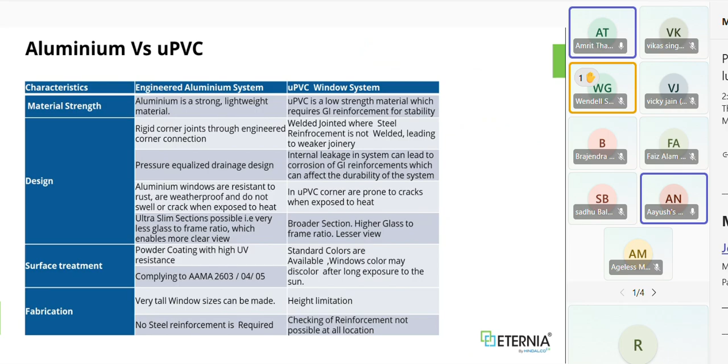So we have already covered aluminum versus UPVC, and aluminum versus traditional aluminum system.

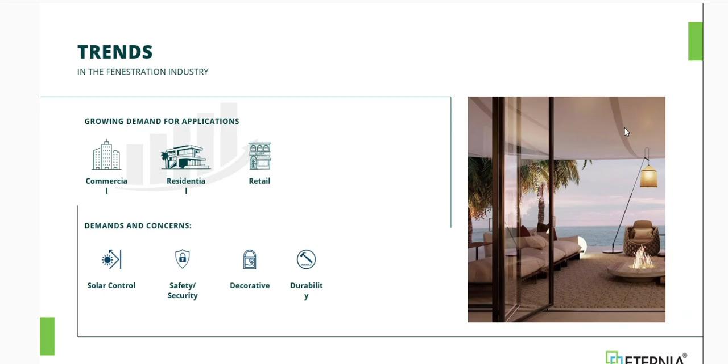As the years pass, you cannot know if the weather will remain the same. We are all offering products for another 10, 20, or expected to be used up to 25 or 30 years, but we cannot predict the environment for the next 50 or 10 years. So the climate changes day by day, and as India is in the fourth position for cyclones, that means your windows need to be stronger to withstand it.

That's why tested system windows are required in the market, so we can ensure our windows can withstand up to 2.5 kPa. Each area and location has different wind speeds, which can easily be found on Google.

So when we know the wind speed, after knowing the building size, length, width, and height, we can calculate the wind load of that particular location. In Window Maker, this feature is automatically involved - whenever you put in the location and sizes, you get the wind load automatically in the system.

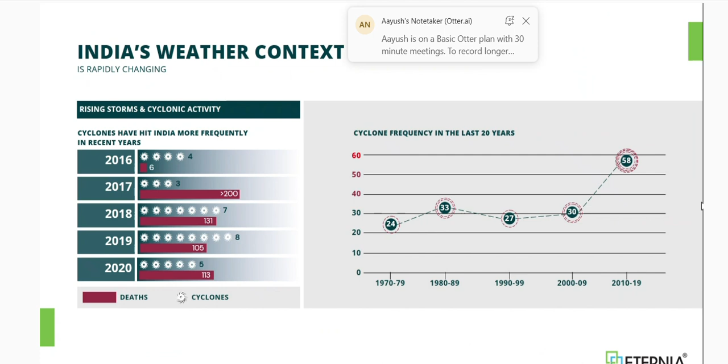If we talk about percentage, in the last 20 years it rose from 30 to 58. This is the percentage increase of cyclones in the last 10 to 20 years - a major impact, so we design the system accordingly.

So that's just a general perspective about the environment, so that you are aware of why you require a better quality of windows in your house to protect it over the next 20 to 30 years. So you need better windows.

So if we talk about windows and doors, there is a difference between windows and doors. Windows are only required for light and air to pass, but people cannot move through the windows. The bigger opening through which people can pass is called a door. So this is the difference between the door and the windows.

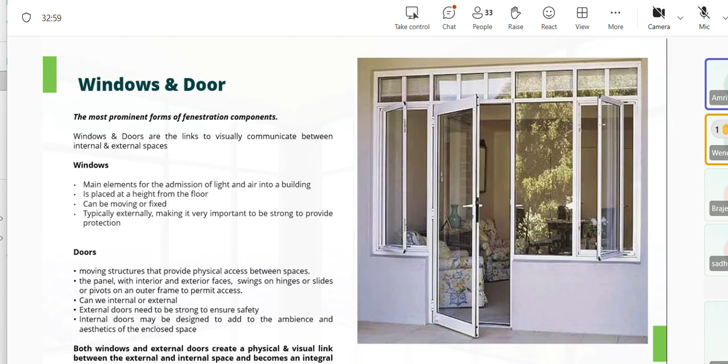There are two basic categories of windows, called sliders and casements. All the different typologies and segments in the market come under only two categories. One is called the casement category, the other is called the slider series. In sliders you can have lift and slide, tilt and slide, minimal, basic slider. So all kinds of sliding come under the sliders.

And in casements, you can see fixed windows, openable doors, windows, ventilators, tilt and turn, sliding folding. These all come under the casement. And then it gets subdivided at different levels. If you talk about the openable, it becomes side openable, bottom hung, top hung. These are the openables. Then if you talk about side hung, it can be a single sash or a twin sash.

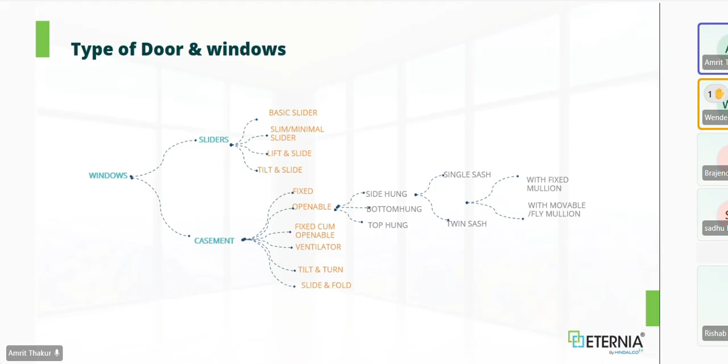If we talk about fixed with a mullion, or movable with a fixed mullion, there are multiple segments, and then again it can be divided into further segments. So the two major categories are slider and casement.

These are the various typologies which we talked about on the previous slides. You can see this is called openables. This is called sliding. This can be a French openable, where both shutters can be opened. This is called a top hung window. This is called tilt and turn. This is called top hung windows. This is called sliding. This is center fixed sliding panels.

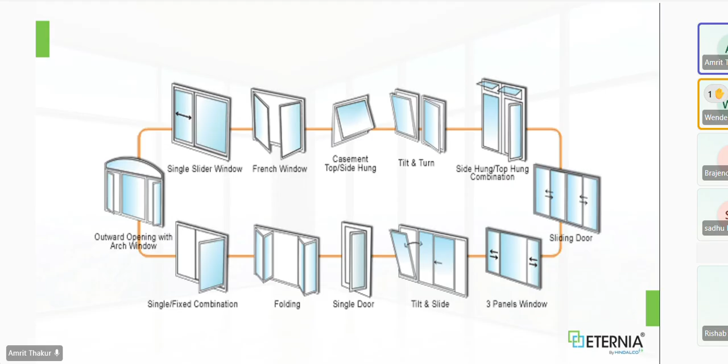Tilt and turn, tilt and slide, sliding with a center opening, foldable. This is a fixed window or a combination with openable. So these are the various small combinations visible on the screen. Besides these, you have multiple types: bay windows, rotatory windows, arch windows, sliders, slimline. So multiple types of windows are there.

And now we talk about some nomenclature normally used by civil engineers or architects. This nomenclature you will easily see in your day-to-day life. So if we talk about this, the top portion where the window is screwed at the top, this surface is called a lintel.

The bottom surface where the window is installed is called the sill level. And the left or right portion where the window frame is fixed, this vertical portion is called the jamb. So there are three terminologies you normally use: the sill, the lintel level, and the jamb side. These are the basic nomenclature you'll be using in your industry.

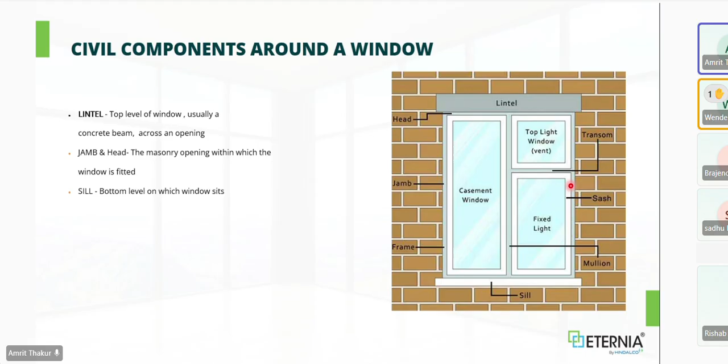Now we talk about the window components. We talk about the fixed window. This is called the outer frame, which is fixed on the perimeter of your opening. The frame visible on the opening perimeter is called the outer frame. And in the center portion, one member comes horizontally and one vertically. The vertical member is called the mullion and the horizontal member is called the transom. So these are two different profiles.

And then if you see the openable part, this is called the sash, or you can call it the shutter. And at the bottom, there is no member here. But if there is a member, it's called with threshold, without threshold, flush threshold. So the bottom member which comes in between the doors is called the threshold.

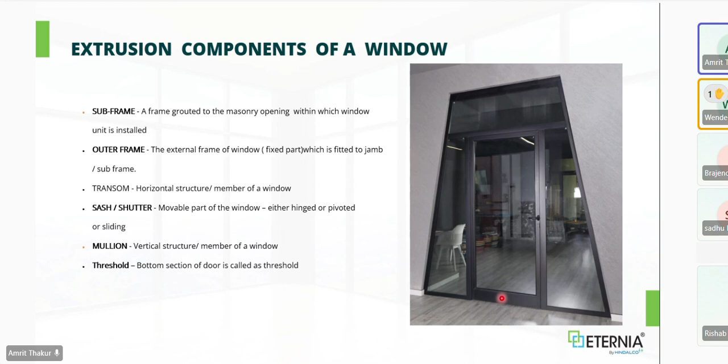Now we talk about sliding. In sliding, the outer frame is the frame fixed on the perimeter. Then you have shutters which slide. These are the two sliding shutters, called sash or shutter. And these are called interlocks.

The center part, like a mullion, this center is called the interlock. Interlocks are of two types, inside and outside. The outside can be a projected one, or not projected, a flush one.

Inside is your flush or inside is also projected. So different types of interlocks are available based on different companies, based on different series. So these are called a normal interlock. And then this side where the handle is getting fixed, this is called the handle section, the vertical handle section. And these horizontal members and the vertical member are called Georgian bars. So this is the basic component which we'll be using in the slider, and the previous one was for the casement.

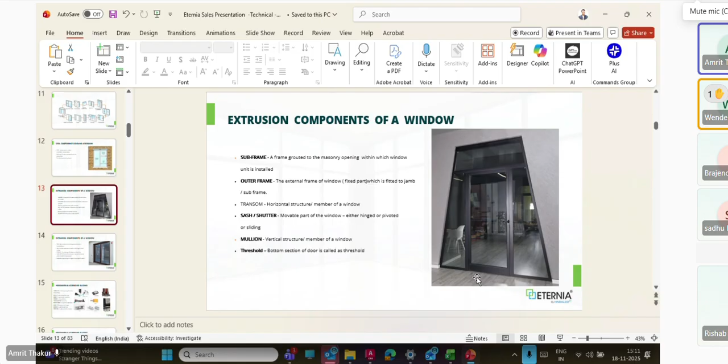Now we see some hardware components. There are a lot more, but specifically these are the components which will be used. This is called corner cleats. This is the shape. This can be an extruded one, or this kind also. So there are multiple types of corner cleats in the market. This is one type which will be fixing your shutter, and it will be used in outer frames.

This is the gasket. Its size or design will change based on your outer frames. The purpose of this gasket is to cover the gap. Otherwise, dust will be accumulating in these cavities. To avoid that, we put this kind of gasket.

These are called rollers. You have multiple types of rollers: single roller, double roller, adjustable rollers. They are fixed in your shutter bottom. You always have one pair of rollers on a single shutter. Each roller has a different weight capacity, so the roller is decided based on the weight of your shutter.

This is called striker. This is the nib which will be fixed on your lock body, and this is your receiver. This lock portion will lock this. This part will be fixed in this cavity, and this will be your handle part. When you move it up and down, this notch or nib will insert in between this to lock and unlock.

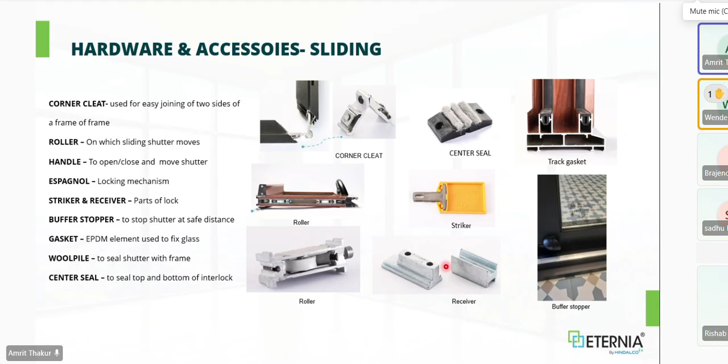This is the handle which I am talking about, and this is your nib. This is called the BSM lock. This is the main lock body. This is the cover cap. You can see this comes on the outside face like this, and this inside one is called BSM. And this bolt is called a mishandling.

This is a bolt, duo bolt. So this will be fixing as a mishandling when it will be getting pressed, so the stack can move up and down. Otherwise, it cannot move. And this is your nib, which will be inserting for the locking purpose. And this is your receivers.

This is called junction plugs. These are all junction plugs. So the junction plug which will be coming on the handle side. This is your handle side where you will be fixing your handle. So this is called handle junction plug, and this is called interlock. So at the interlock position, wherever the junction plug is coming, it's called interlock junction plugs.

And this is your interlock cap, which will be visible from the outside. This is visible from the outside. This part will be going inside, and this cap is called interlock caps. This interlock cap will be a projective one. If the interlock is projective, this kind of a cap is required to cover the cavity.

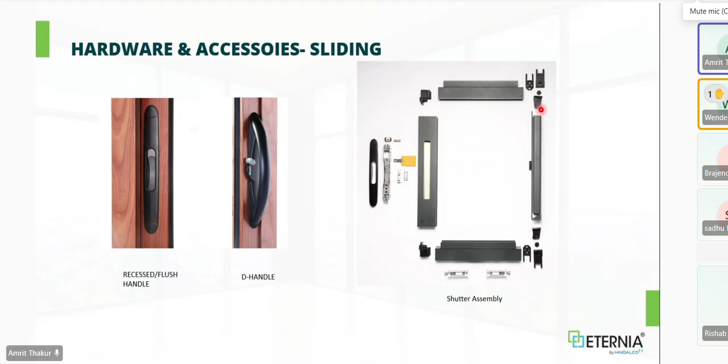If we talk about the glass, these are the few glass terminologies used by the industry. A single glass or SGU, single glass unit. We always offer toughened glass. We are not offering any annealed glass. Annealed glass is exclusively required when the size is too small, where toughening is not possible. In that scenario we are giving the annealed. Otherwise, we are always offering toughened glass.

So whenever we are talking about the glasses, we are talking about the toughened glass. So this is a toughened glass. This is a single glass. That means a single piece of glass. This is double glass. That means two glasses sandwiched together with the spacer tape. That is called double glass unit.

So the glass thickness can vary: 5, 5, 5, 6, 5, 6, 6. So these are the different glass thicknesses that can be used. The spacer has different thicknesses, for example, 8 mm, 10 mm, 12 mm. So if we talk about 20 mm glass, that means 5 mm outer glass, inside is 5 mm glass, and the center will be your 10 mm spacer. So 5, 10, 5, that is called DGU glass.

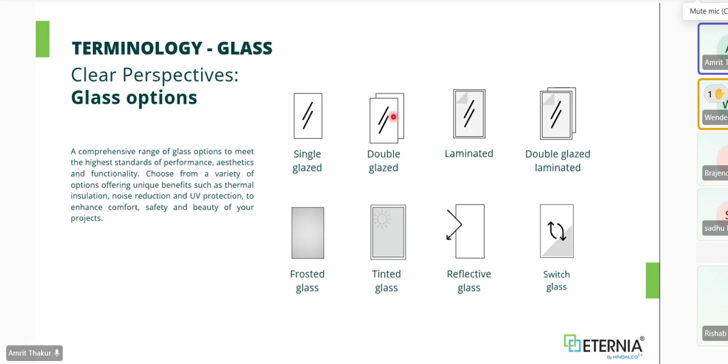Then there is one type of glass where you have blinds. So in DG you have a blind option also. You can have a blind which can be a remote blind or manual, or you can have an automatic. These are the various glasses. Here it is an image reference. You can see this is called a single glass. The single glass is available in 5 mm, 6 mm, 8 mm, 10 mm, 12 mm. These are the single glasses. Above 12 mm, there is no glass thickness available in the market.

Then you have a DG glass. So you make a combination with these glasses with a spacer. So you have a spacer with a limitation of 8, 10, 12, 16. So these are the spacers. So it is always recommended, whenever you are taking the thickness of the glass, your spacer needs to be 2x that size. Means if you are taking 5 mm glass, you need a minimum 10 mm spacer. If you are using a 6 mm, you need a minimum 12 mm spacer. 8, you will need a minimum 16 mm spacer. So always the glass thickness into 2 is the spacer thickness.

Most of the cases I have seen the glasses have been wrongly selected by the dealers. They are selecting 5-8-5, 6-8-6. 8 is not the correct spacer selection. Always use a minimum 10 mm spacer or go with a 12 mm. So that is more important to understand. Then this is the lamination which I am talking about. This is the layer which is called PVB layer or SentryGlas layer. These two glasses will be sandwiched. This is a railing, glass railing. You can see this kind. This is a laminated glass.

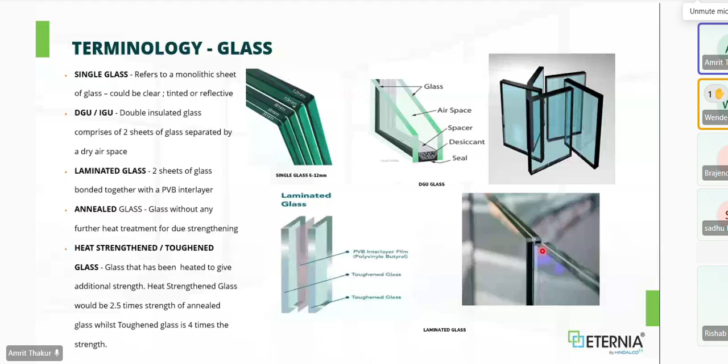Only the magnesium quantity is altered in the system, increasing the yield strength of your profile to make it 1.5 times stronger than normal alloy. So that is your Duranium material. It is slimmer, stronger, sustainable.

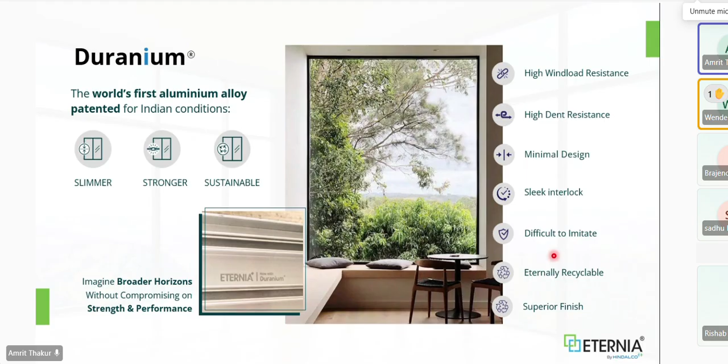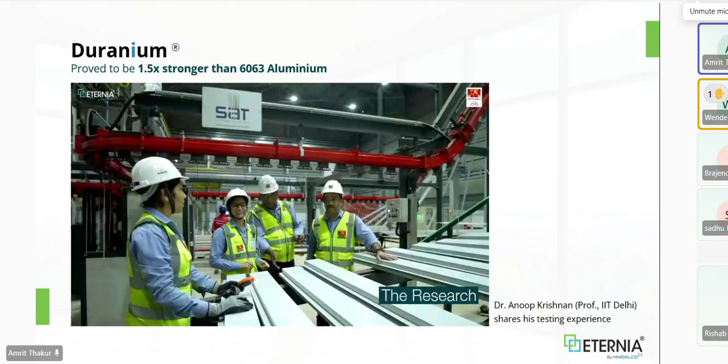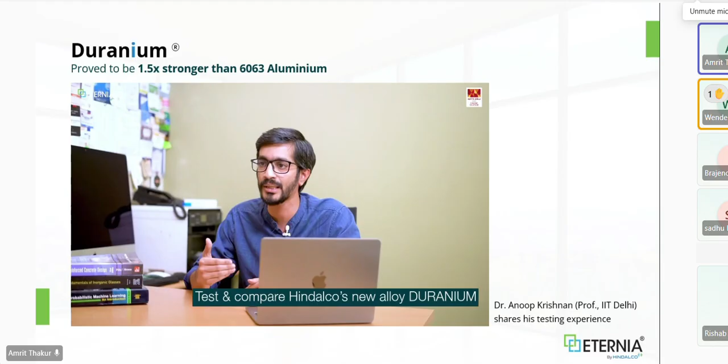Hi, I am Professor N.M. Anoop Krishnan from the Department of Civil Engineering, IIT Delhi. I work at the intersection of computational modeling, materials, and artificial intelligence and machine learning for materials discovery. Windows form an essential part of our home. But do we know how these windows are designed? Researchers from Hindalco and IIT Delhi got together to discuss this. More importantly, what is the role of aluminum and different types of aluminum in governing the strength and durability of these windows? Interestingly, Hindalco had developed a patented aluminum alloy, Duranium, so we wanted to also test how Duranium windows will perform in comparison to the standard aluminum windows.

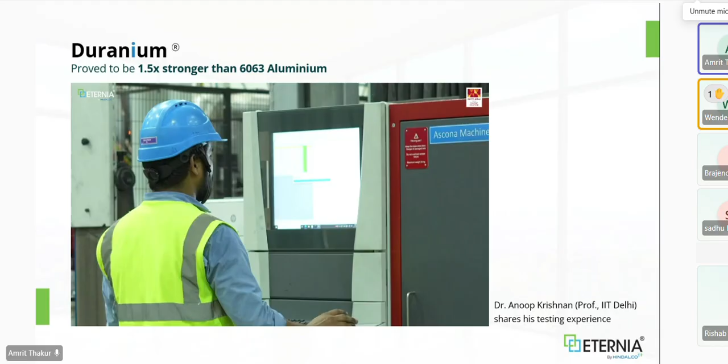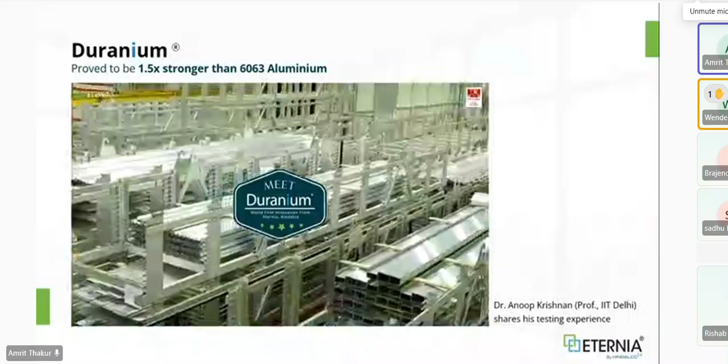We actually created windows and tested them in the lab and then made computer models for these windows using finite element methods and other numerical methods. To evaluate these models, we considered aluminum 6063 and the Duranium alloy. Duranium failed at a load 1.5 times higher than that of the aluminum 6063 windows, which essentially means that Duranium can take 1.5 times the wind load of the regular alloy. What does this mean? This means that even thinner sections of Duranium can take as much load as regular 6063 aluminum alloy. The results were really exciting to us. We decided to share it for the benefit of the larger community. The work was written up as a paper and was published in the Journal of Building Engineering, which is a high impact journal in the field of civil engineering. The researchers, who are peer reviewers, really appreciated the work and highlighted the benefit of this for the society.

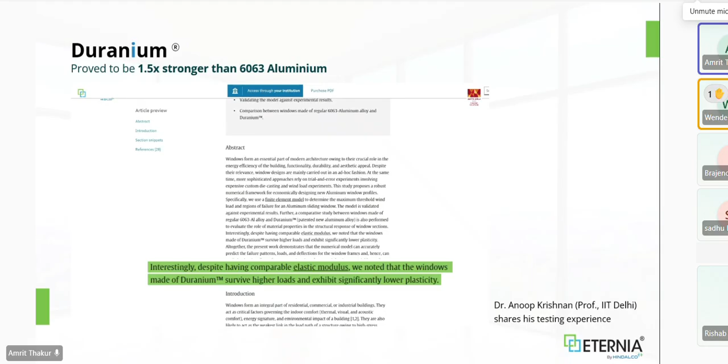So that was all about Duranium. Now the second point, that is WiWA. This is another patented method to identify whether the window is best suited to your requirement or not. So WiWA is wind, water, air. That means your window needs to be tested against wind, water, air, and we are taking the parameters we receive against wind, water, air, putting them in an algorithm and finding out the actual scoring of your product. So this is another advantage of WiWA in the entire history of the door and fenestration industry.

Only Eternia has thought about giving a window a scoring factor, which will be a unique way to measure the performance of your window irrespective of other windows. In layman's language, you can easily understand it as similar to electronic items where you get star ratings, 5-star ratings. If the product is 5-star, it's a high saver product, and if you have a 3-star or 2-star, it uses high energy. So similarly in the WiWA scoring we will be giving a figure from 0 to 10.

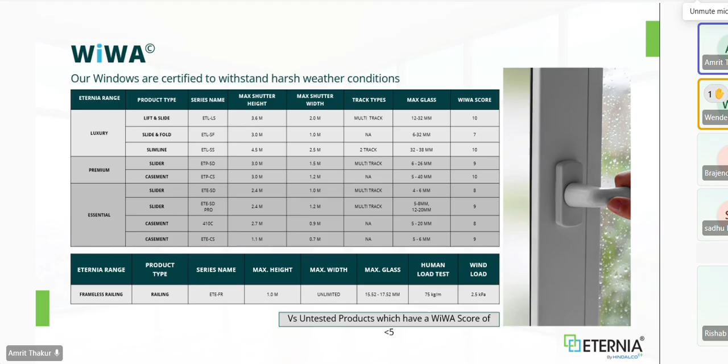Another is your Green Pro certificate. So what is the Green Pro certificate? It is IGBC Green Pro certified. Your product is a green product. That means whenever a builder is making a green building, or is taking some subsidy or benefits from the government by saying that his building is a green building, he needs to use green certified products in the building. In each area, whenever he uses a green certified product, he earns some points, and cumulative points are required to qualify as a green building project. Our product is green certified, so he will get the benefit of earning those points while using our product.

Then we have a warranty. We have a 12-year warranty on the profile and a 5-year warranty on hardware.

We talk about our presence as Hindalco. We have an integrated supply chain mechanism. In the entire India, only Eternia, or Hindalco, is the company taking raw material in the form of ores and supplying the end product as a window. This complete processing will be under one roof, under Hindalco. We are not taking extrusion from a third party or any other company. We are not outsourcing fabrication. It will all be under one roof.

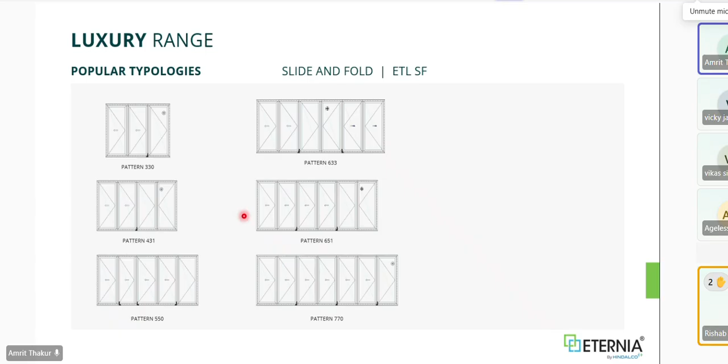I have a question here. Yeah, Vikas from Kolkata. As you said, there's a cost implication between these two options. So how much is it, and how much control do you have over it, application wise?

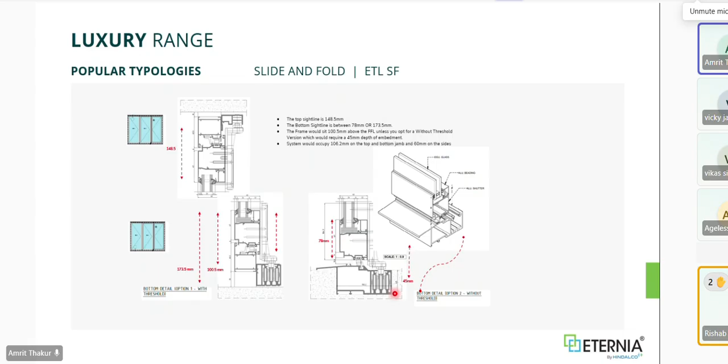So that was the top and bottom. Now we see the straight sight line for your center part — it will come around 206. So 206 is the vision part for your sliding folding. This is the sight line for your sliding and folding panel.

Any questions now for sliding folding? Any question?

I mean, internal application as well as external application — both we can use for sliding folding, only some arrangement needs to be done when it comes to the flooring part. Correct, yes, yes, yes, yes. You can use it, okay.

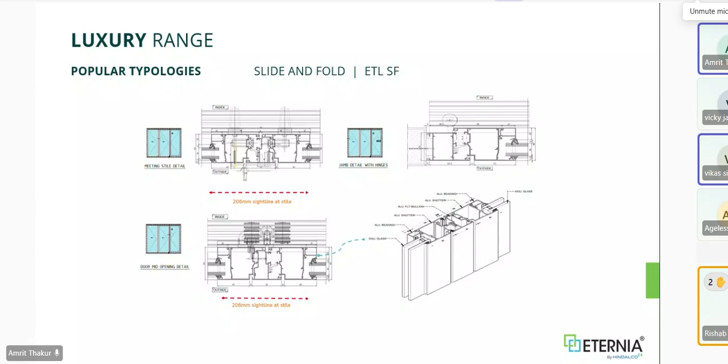If you talk about the interlock, you will be getting 20 to 29 mm. If you talk about the weight capacity, the roller is designed for a 400 kg capacity.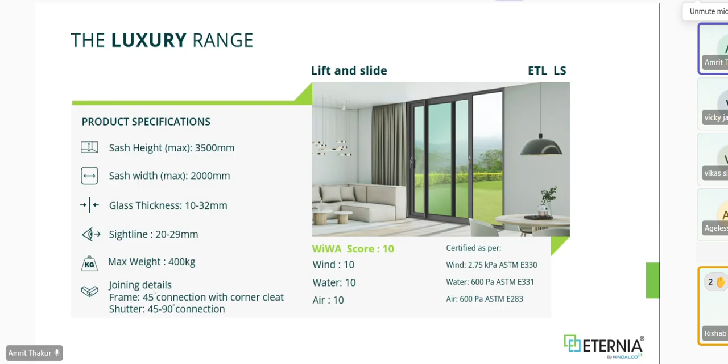Now let's talk about the typologies. You can make 5 typologies: 2-track 2-shutter, 2-track 3-shutter, 2-track 4-shutter, 3-track 3-shutter, or 3-track 6-shutter. One important point to note is in 2-track 2-shutter.

In 2-track 2-shutter, the interlock will be a sleeker one. Like if you see in ETP SD or the slimline, 20 to 25 mm will be visible in the interlock. But in the 3-track system, or 4-track, on the 4-shutter, 3-shutter or 6-shutter

this interlock is not going to be the same. Why is it not remaining the same? Because in lift and sliding, the main purpose is to lift and then slide.

To lift the shutter, you need a handle. So a handle is required in each shutter. In this 2-shutter, there is no problem - handle is coming here and here, so interlock is normal and okay.

But in this case, your handle is coming - one is here, second is this position or this position, depending upon the orientation. So left or right, if there's one panel you need one handle, and then the third handle will be here. So three parallel, three handles.

So handle is the block body, each and everything requires a bigger section. So here you need to use the same section which will be used at the handle section.

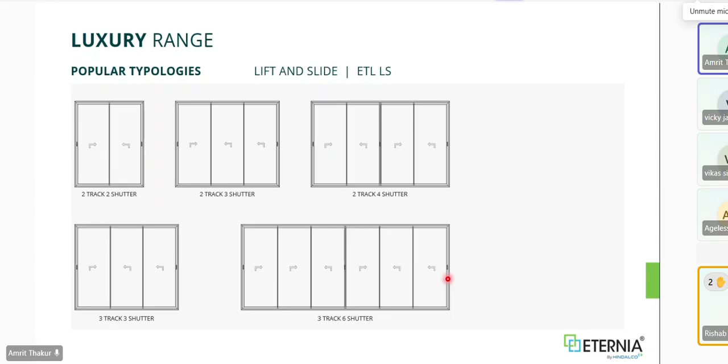I will show you some section detail. If you see this, this is a normal two track two shutter. This is your handle section, which will be coming at the outer frame. This is your interlock section. These are the different interlocks we are talking about, 25 to 20 mm. So this is the standard one, which will be offered in the two track two shutter.

But when we talk about three track three shutter, this is the condition. If you see, this is the design cutout at 3, so here you need a bigger one. This is 78 mm of interlock coming because you need to put your handle, and this projected handle will be coming outside. This is the condition for 3 track 3 shutter, so this is the bigger handle section coming.

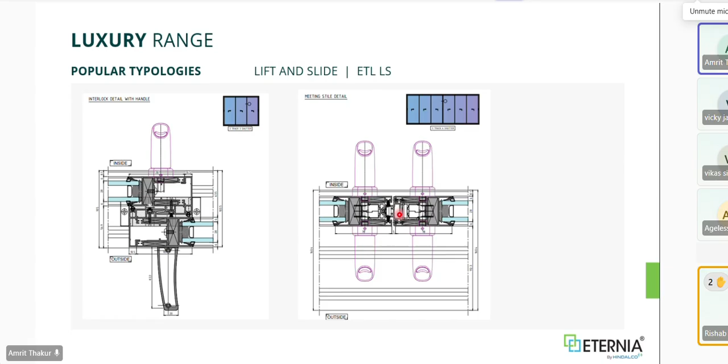In case of center opening, you will be having this kind of two handles. One handle is coming on this section, another handle is coming on this section. These are the basic variants that you need to understand. The key is this will be a bigger one.

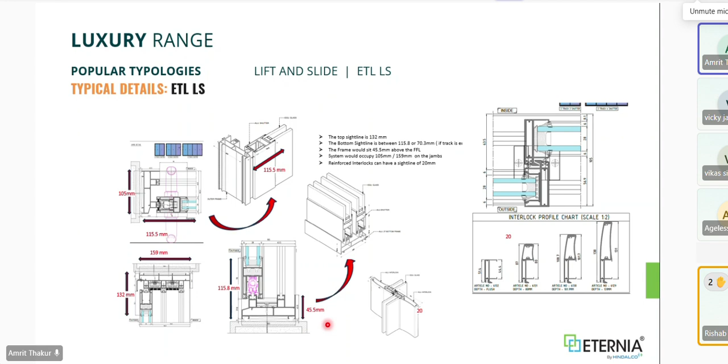So that is about the lift and slider.

And slimline, we are not going with this slimline. Some upgradation is ongoing in the design department for slimline. Once the updated product is available, we will share the updated one and roll it out, but till that time we will not be offering any slimline in the market. We will be holding the slimline for further notice. So slimline will be obsoleted, and we will be making new sliders and sliding folding doors with different specifications and sizes. So we are skipping this for now.

So now we have a premium range. In premium range we have two products. One is your ETP and another one is a casement, ETP CS. ET means Eternia, P means premium, SD means sliding door.

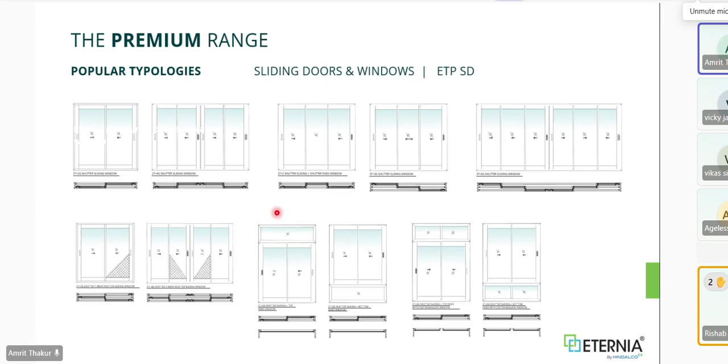But till now you will be getting two track, two shutter, three track, three shutter, multiple various options and combinations, mesh shutter you can get it. So a few non-typical designs we are going to add in the upgrade later, in another 1 month or so. So these are the various sightlines. You can see this is a two track option. This is 90 and 42.

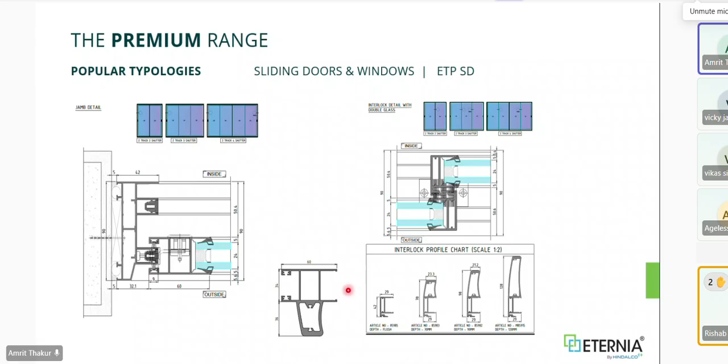So this is your interlock where you have four types of interlock. This is your handle section with the reinforcement. So above 3 meter, your handle section is going to change like this reinforcement handle section. And this is the various combination of your interlock. Right now you see there are four types of interlock.

We will be obsoleting the third one. We are going to remove this one. So this is going to be discontinued. Only the flush will remain. Then 50 mm. Then you have a 120 mm. So this 90 mm is going to be closed. We are going to discontinue this because multiple inventory is coming, so we want to reduce this inventory, multiple inventories. So this is going to be discontinued.

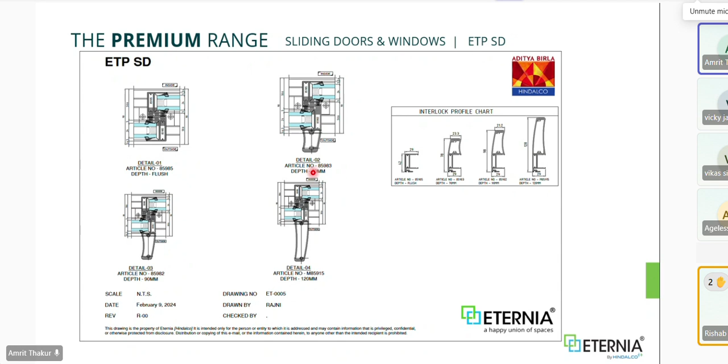But we have checked structurally, if the wind load is lower, if it is a wind load of only 0.8 kPa, then you can go up to 3.6 meter with this center opening also. So we'll check and we'll implement it in the window maker also. Theoretically it's passed, theoretically it's going well, but a trial needs to be done in the factory first. Then once the trial is done, we'll implement it in the window maker. So you can offer 3.6 meter height center opening with 0.8 kPa.

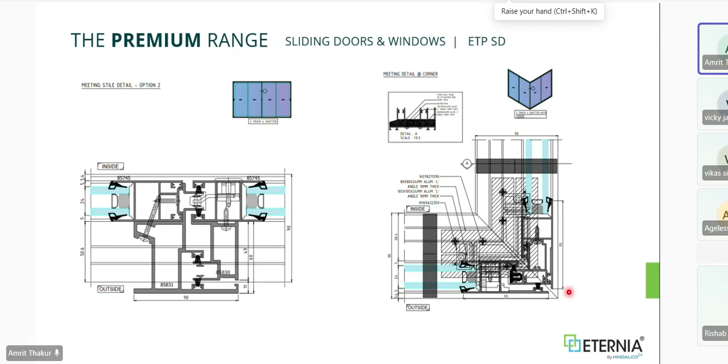Then it comes to ETPCS. In ETPCS, we are offering 3 meter height and 1200 is the maximum size of a panel. So a 1200 by 3 meter panel you can make. Glass thickness you can go up to 32 mm. In the openable you can go up to 32 mm. On the fixed you can go up to 30 mm or 36 mm. In between you will not have any kind of beading arrangement. So you have 30 or 36 mm. In the openables you have 32 mm.

So here the weight capacity of a sash will be 180 kgs. So hinges are designed for 180 kgs. Here we are coming up soon with two options for which the trial has already been done. One is your concealed hinge, auto closing hinge. So what does that mean, auto closing hinge? That means we are going to replace the hinges with new hinges, and that will help as your door closer. So you don't need any kind of door closer. The hinge itself has the capacity of door closing.

So that is going to be added in your system but not at present. We are working on it. The SKU is generated. Once the go ahead is given to us, we will be implementing it in the window maker. So that is going to be one added option. Another thing which we are going to add in this ETPCS is your hinge, but that capacity is up to 120 kgs. Here it is 180 kgs. The wind load, the system is designed for 2.5 kPa and the water and air tightness is 750 pascals.

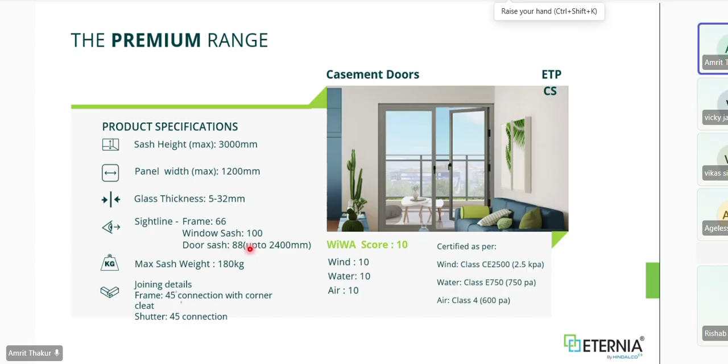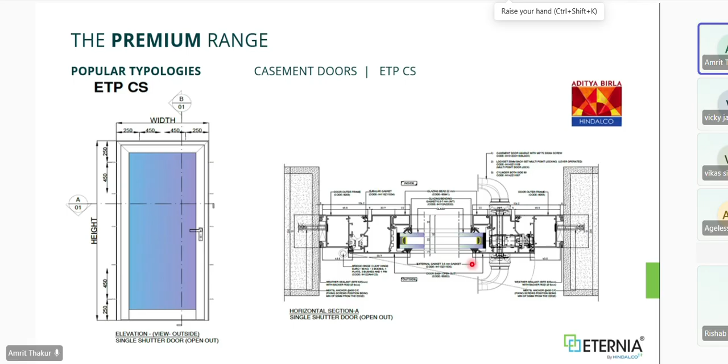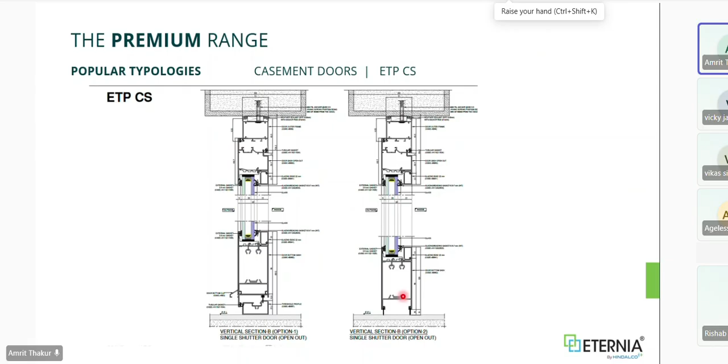Typologies: you can make any typology, whatever option you can think of. This is a typical window section. This is called 88 mm. If you have a bigger section, you will have a 100 mm section. This is called without threshold; you see there is no member in the floor. Then you have a low threshold. And if the top profile is repeating in the bottom also, that means the full threshold. So these three types of threshold will be available.

And if we talk about windows, there is another point we will be clearing. If you give inside openable, you can go with your hinge, no problem. But if you are opting for outside openable, try to give it with a friction stay instead of hinges. Always make outside openable with friction stay instead of hinges. Friction stay is more user friendly compared to hinges.

Reason: in hinges you need a friction restrictor arm. Restrictor arms are of two types, one is 45 degree and one is 90 degree. By default we are offering 45 degree, meaning your shutter will open only 45 degree, so you will not get 100% opening. So you go with the friction stay, and you will get a 90 degree opening and 100% opening. We cannot go with a 90 degree friction restrictor arm because the quality is not designed for those weight capacities, so that is not useful. That's why we are offering only the 45 degree friction restrictor arm.

If you go with the friction stay, you do not need any kind of restrictor arm, and you can easily operate. Up to 750 mm shutter width, you can go with the friction stay. Above 750, you have to go with hinges. For hinges, we are coming up with another option, an automatic restrictor arm kind of system. That is under development, and once it's done, we will add it to the system.

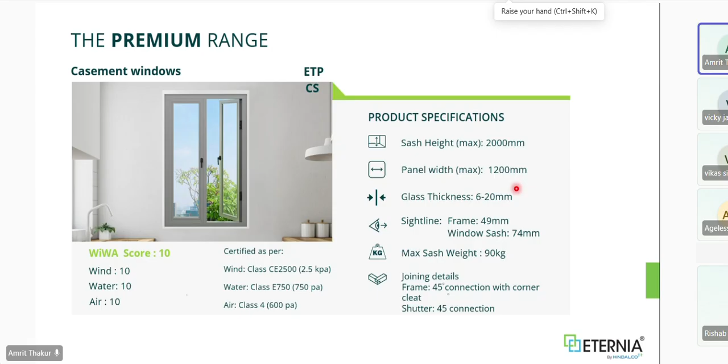But till then, you have to go with a friction stay up to 750, and above 750 you go with a restrictor arm. Because the bigger the panels, the more difficult it is to close your shutter, since you cannot reach your hand to the last point when your shutter opens more than 90 degree. So you need to keep that in mind. The rest of the parameters remain the same.

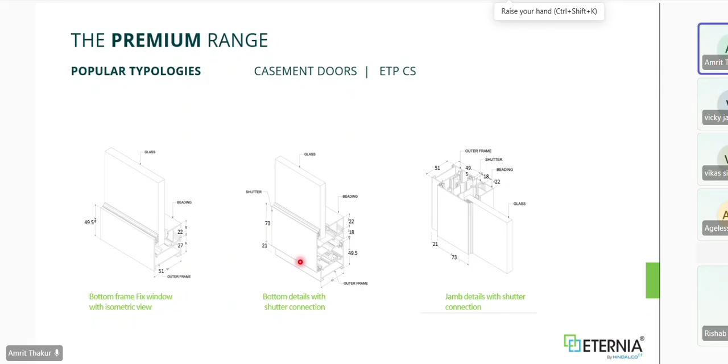If you talk about the section size, it is 51 mm. The outer is also 51 mm for the door or window. Only the height and this cavity change. This is your 73 mm; in the door it is 83 mm. And this is available in inside and outside openable. Then this is essential; we will cover it tomorrow.

Now we can open for questions. Any question, you can ask.

Amritji, Rishabh here. A couple of questions. What is there in the printed brochures, those dimensions vary a lot from what you were showing in a lot of places, right? And apart from that, from your knowledge, you said the height can also go up to, let's say, 3.6 meter versus 3.5 meter, right? So all of these variations are there. So how do we get access to the exact limitations for a particular variant of windows and all that?

All variants are already marked. 3500 is the standard that is mentioned. The extra 100 we are giving because technically we can go up to 3600, since when we are talking to clients, we say we will be giving you a 12 feet height. When you are talking about 12 feet height, it will come to around 3600.

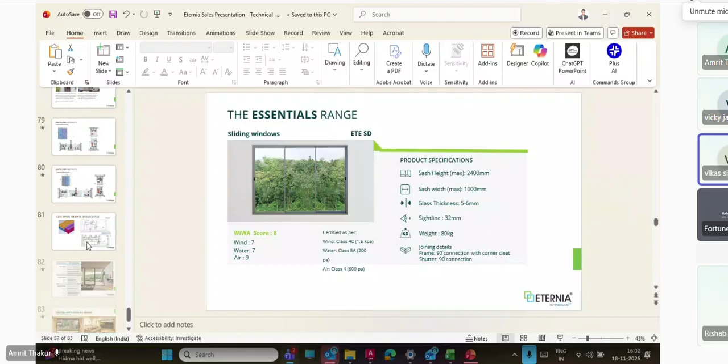That will be on the perimeter or in the balconies is okay, but I don't think they will be okay with that. That's why I'm saying you have to explain the options. And another thing in the market, when you go for the internal sliders or any internal kind of windows, they come more economical as compared to the external one. So your cost is going to be on the higher side, and he will not be able to.

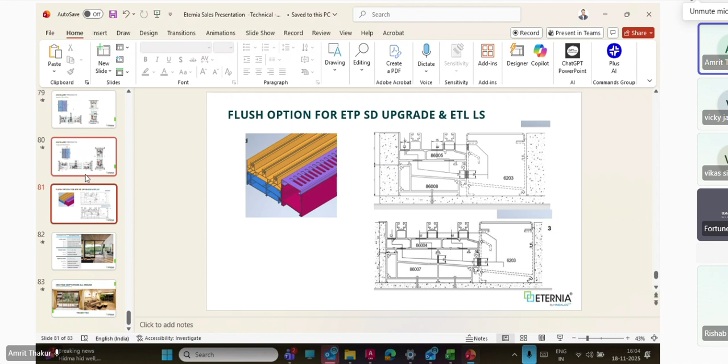Amritji, that is not the point. I understand that. However, the point was how I provide this solution as an alternative to the tracking system prevalent in the market at the moment. Yes, this is the only alternate option you can have right now. Got it. Okay, thanks. Anyone?

Amritji, just one question. Very informative presentation. A lot of details about the sections and the profiles, which I don't personally have. So would you be sharing this presentation with us after this call ends? This is a very heavy file. You can reach out to Abhilek, put a mail to Abhilek, because we have technical catalogs for all series.

Not particularly this. You have them series-wise with all different sections and details, with the fabrication manual. It's called a technical manual. We have them for all series, but the sizes of these files are too big. Previously I had a discussion with Abhilek to put this on a big screen. I'm not aware what stage he is at on that, but access will be given to each one. Got it.

It's already been discussed and given the go-ahead to circulate the items, but there will be a little plus-minus because these are the old catalogs. Some things have not been updated. So keep in mind there will be some alteration, because the final one will come later: first the product needs to be updated, then we work on the catalogs. The existing one you can take from Abhilek. You can reach out to Abhilek.